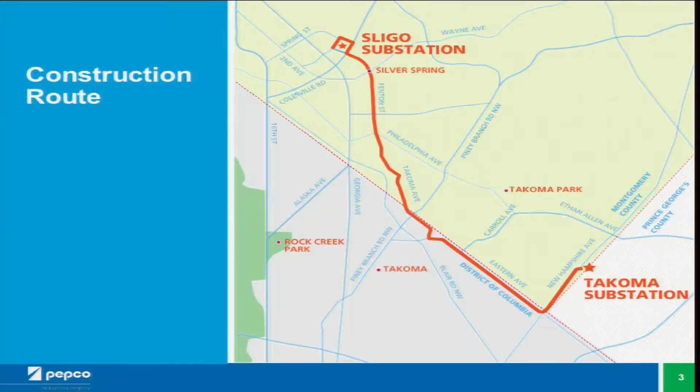I will now be stepping aside and handing over the presentation to our expert, because as much as I would love to tell you about the underground transmission construction process, it's a little bit out of my bailiwick. So I'll hand it over to Mr. Rich Ellison with CW & Sons.

Good evening. A lot of the questions that come up when we're talking to people in the community is, why is it taking so long?

Part of what I would like to show you is a step-by-step process of what we go through to put this in, so that you can better understand why this is a slower process than perhaps the average project you see out here with someone just digging a hole and putting a pipe in the ground.

Now the process starts out with the engineers coming out and laying out stakes like this through the neighborhood to show us exactly where to put the lines.

As soon as these stakes go in, a little truck comes along and you see the guy out there with the spray paint can, looking like your grandchildren with sidewalk chalk all over your sidewalks and the street area. This is to tell us where the underground utilities are. We need to know that before we dig.

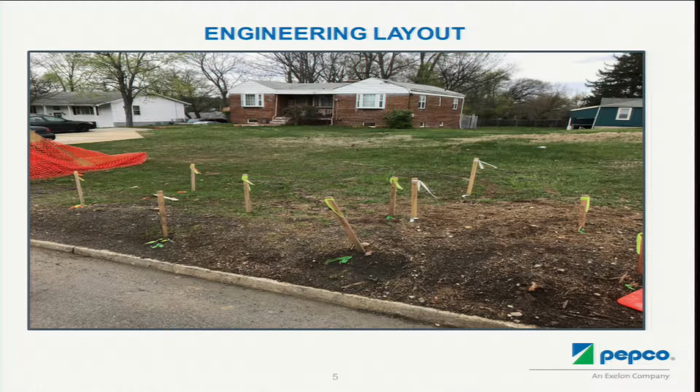As soon as we finish that, one of the noisiest processes is saw cutting. We cut about 12 inches deep to get through the concrete substructure. A lot of the reason for going so deep is so that any noise or vibration from what we're doing in the ground doesn't transmit to buildings or adjoining surfaces around it.

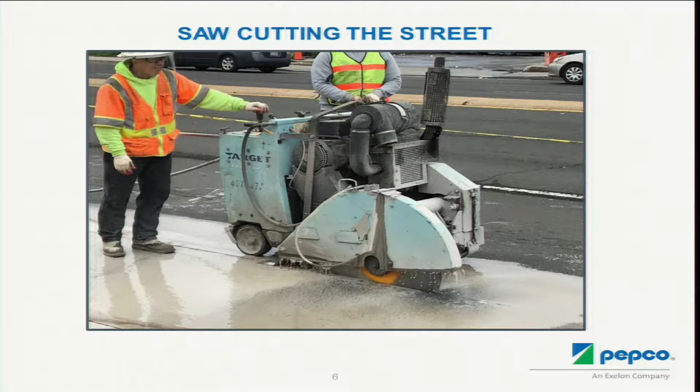When the saw cutting is through, there usually isn't any construction for a couple of days. All you'll see is the street with the lines in it, as you see right here.

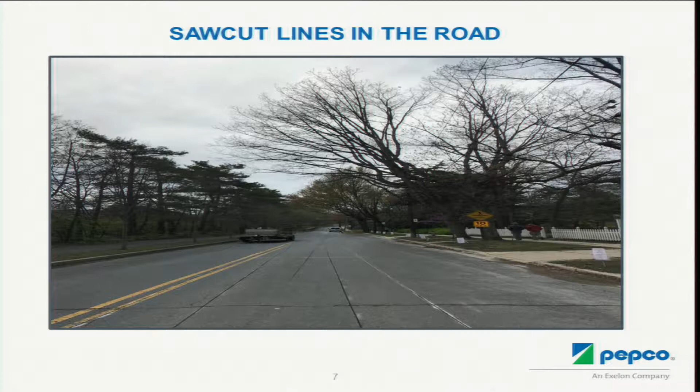Shortly after that, the crew will show up and start breaking out the asphalt. The asphalt is the surface on top of the concrete that we just mentioned.

You notice here the arrow is pointing to the 8 to 10 inches of concrete that is below the asphalt. This is actually the surface that takes the majority of the weight, but cutting through that protects adjoining houses and business structures so that this vibration doesn't damage their property.

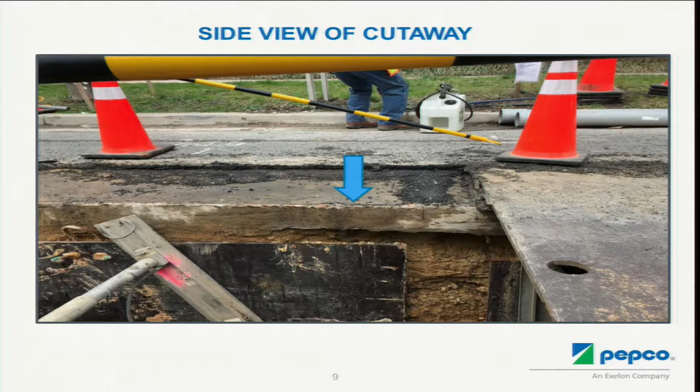Then comes the dirt. As we take and remove the dirt to put these in, these things go anywhere from 8.5, 9 feet deep to sometimes 20 feet deep.

As we're putting the pipes in, we're trying to get them under the other utilities as low as possible to protect them from other contractors digging in the road, also to get them as low as possible out of the way of future construction, and to get more ground around them to absorb the heat from the units themselves.

All of the dirt that comes out of the ground is removed to a landfill. Nothing that comes out goes back in.

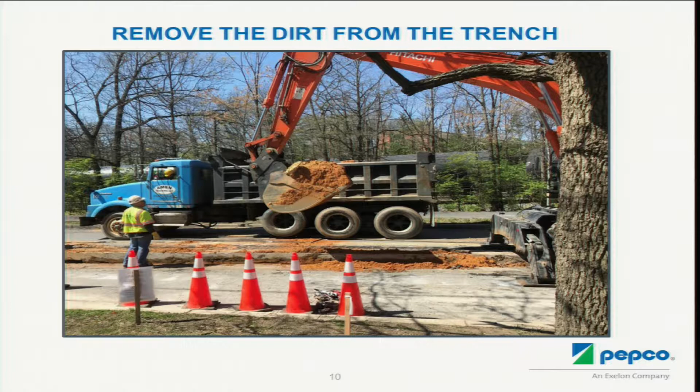I'll mention this truck again. This is one of our trucks. You'll see these trucks all over the road. Some of them will have our markings on them, some will have other contractors' marks on them. Notice the size of the truck, because it's relative to something I'm going to show you in a moment.

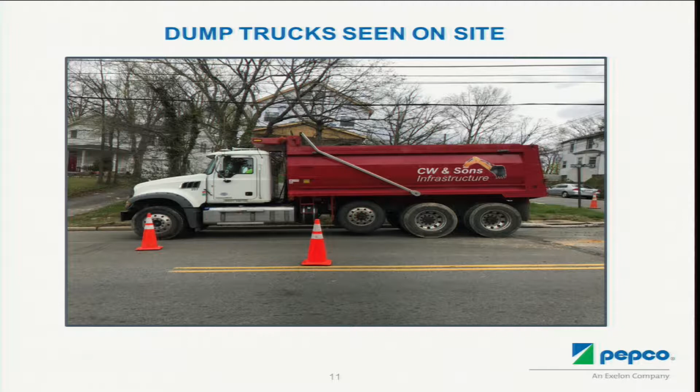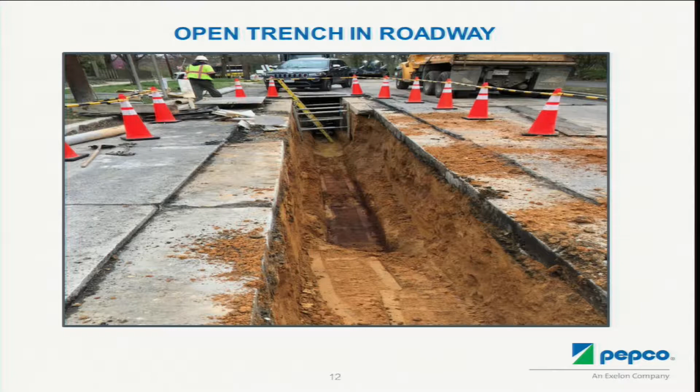So we're either putting in what they call pump jacks, where they're actually pumping against steel plates on the sides, or they have trench boxes that they put down in, which are pre-assembled steel boxes. Once we get them down inside, then the men can be down in the holes working.

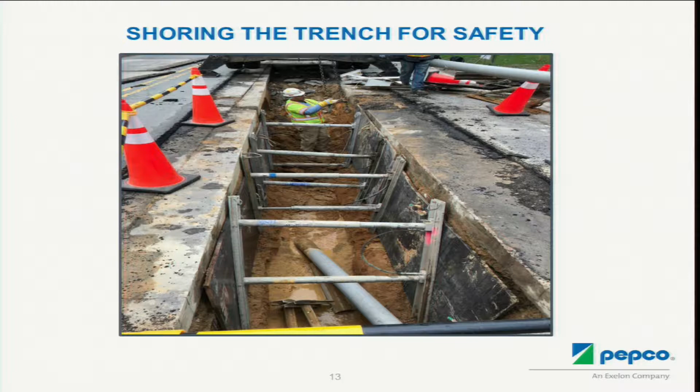Next comes actually installing the pipe itself. It takes a crew of 5 men to put in a single piece of pipe. There has to be men above the ground holding it.

As you'll see here on the face of this, you see the black here, those are spacers. Those spacers have to go every 5 feet. So this pipe has to be put in such a way that you're putting it through these spacers so it's always aligned, because realize we're running pipe 3.5 miles from one end to the other. So it's very important that A comes out on A on the other end.

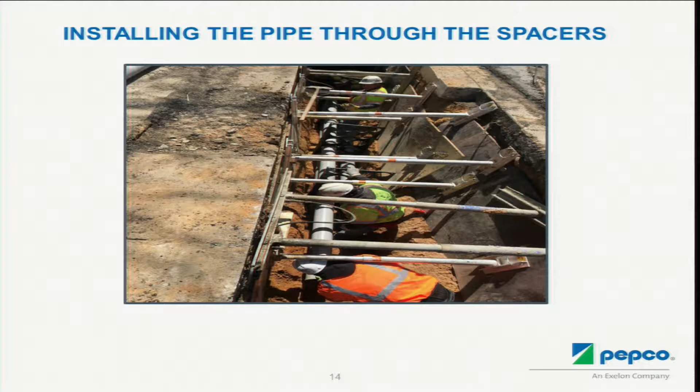Once this pipe is in and installed, we pour 2 inches of concrete on all surfaces and between the pipe itself. That's the red concrete you see right here in the hole. That's done so that if someone's digging at a later time, they'll recognize that this assembly is electrical, so it tells them to stop digging.

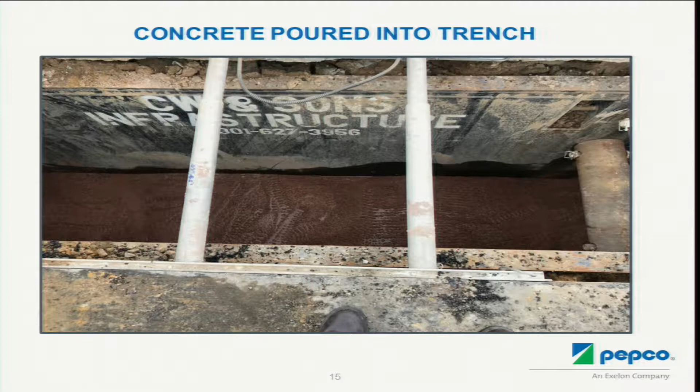Next we start backfilling. When we backfill, we use recycled concrete, or what they call RC6. All the concrete and asphalt that we take out goes out to recycling areas and is recycled, so everything we're putting back in the ground is recycled product.

As we go along, you see the arrow here pointing down to this thing. That's a piece of aluminum foil tape. This is put about 3 feet below the surface, so if someone's digging, it's another indication they've got something down there that they need to be avoiding.

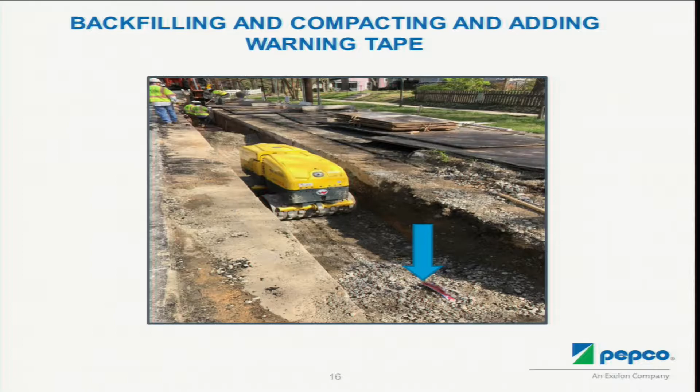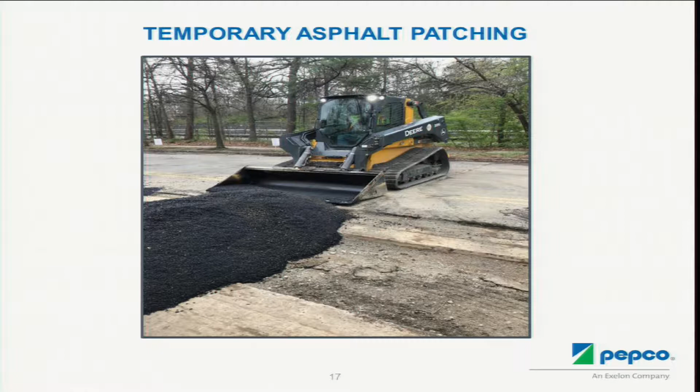Next, we'll come along and temporarily put asphalt paving into the area. This is to return it to the road surface so you can drive on it, so it can be a normal road surface. It's going to be a little rougher than a finished surface, but it's there to be a temporary protection for traffic.

They do roll it out and try to make it smooth, but over a little bit of time, this stuff gets a little bumpy. Especially if you've driven over on Eastern Avenue, all of you know it's very bumpy.

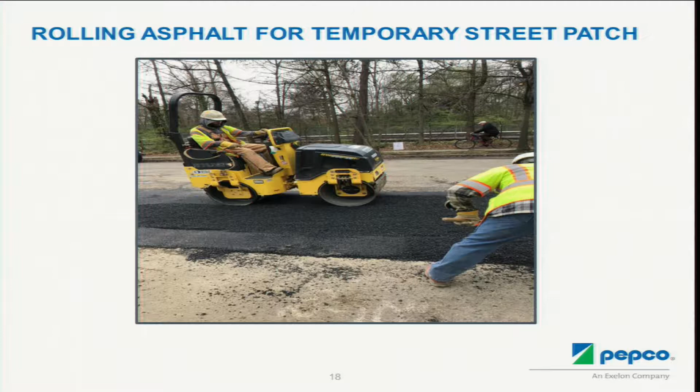Once we finish a section between manholes, the project is planned to come back, replace that concrete underneath the asphalt, and do a full surface paving curb to curb on your streets. So when you finish, you're going to finish with a finished road.

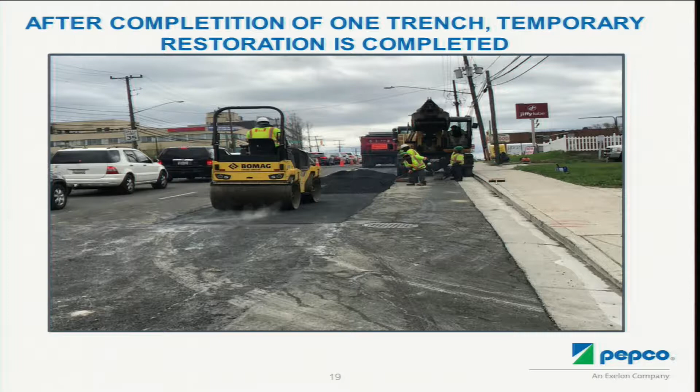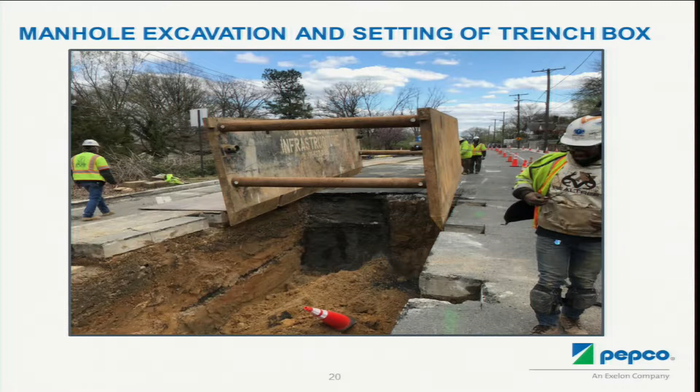The other thing we have to put in, because we need points where we can pull the wire through, is manholes. To give you an idea how big the manhole is, remember I was talking about the dump truck? The dump truck will fit in that hole.

So these are very large holes, which also means for traffic they're very dangerous holes. The steel plates we put over top of them are very important, and we take very seriously how we support this with structural steel underneath it.

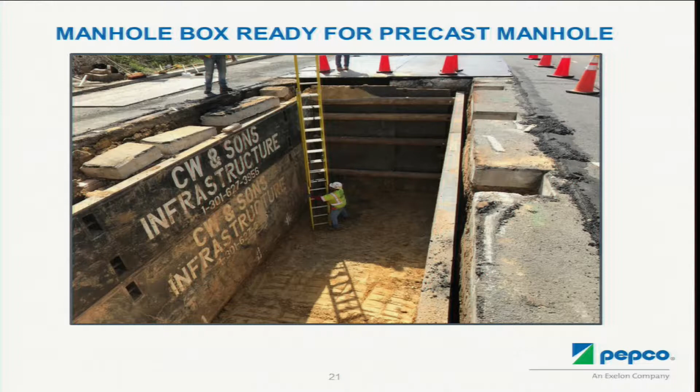This is the hole when they've actually put the line in. They're getting ready to lift the manhole into the hole. Here's the crane actually putting the manhole in. These manholes are about 8 to 10 feet wide and 20 to 22 feet long.

As I said, some of these manholes will be 12 to 14 feet deep. Some of them will go as deep as 20 feet.

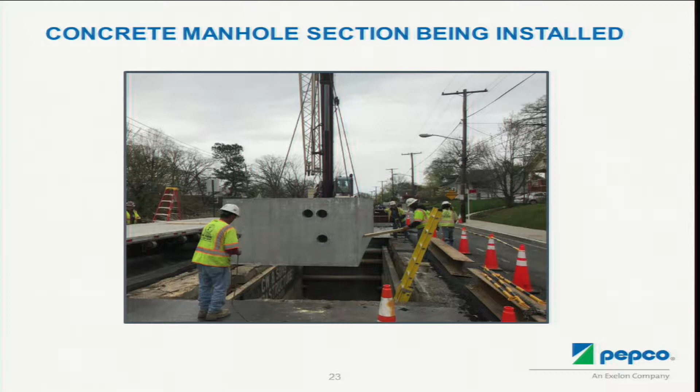When the manhole is in, it's basically just a huge concrete box, particularly made for this use. It already has the holes in it for where the piping will go. They're now going to put the lid on it. You can see that they have a sealant there trying to keep water out of it.

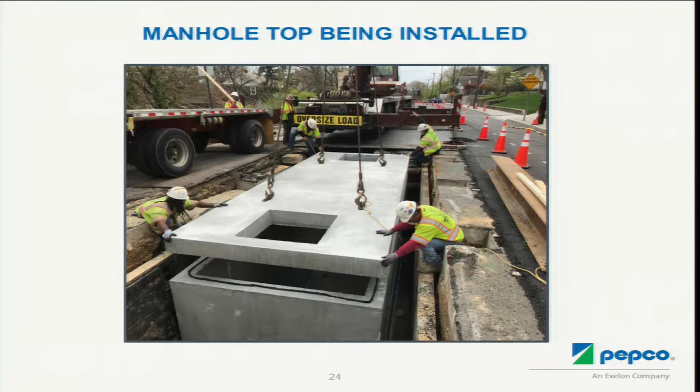Those square holes turn into finished manholes that you see on the street when you come across one and see it paved. That's what it started looking like before that metal cover was put over it.

At the end of each day, we go through and steel plate over anything that's possibly a hazard to drive on. Those plates are all welded together and pinned with steel.

Even so, we have a lot of areas with high truck traffic and bus traffic in it, so sometimes these things pop loose in the middle of the night. We always ask the neighbors to give us a call.

If they hear any kind of metal sound from the plate, we'll go out in the middle of the night and repair the plates again, because some of the buses get a little speed up and start bouncing on those plates, and the welds can break.

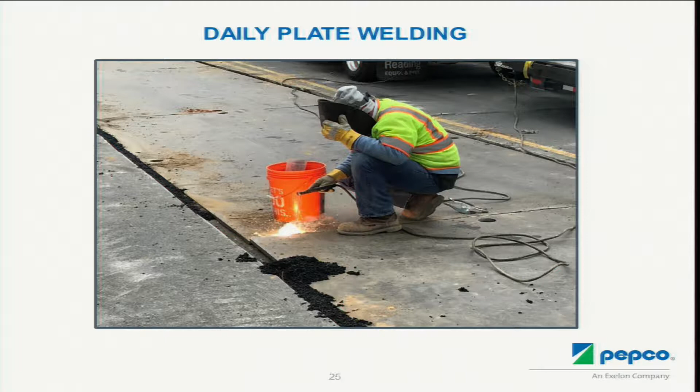When we finish it, we have the plate recessed into the asphalt. Any kind of surface irregularity that comes up, we put what they call CP, or cold patch, around it to smooth it out, so it's as smooth a driving surface as possible.

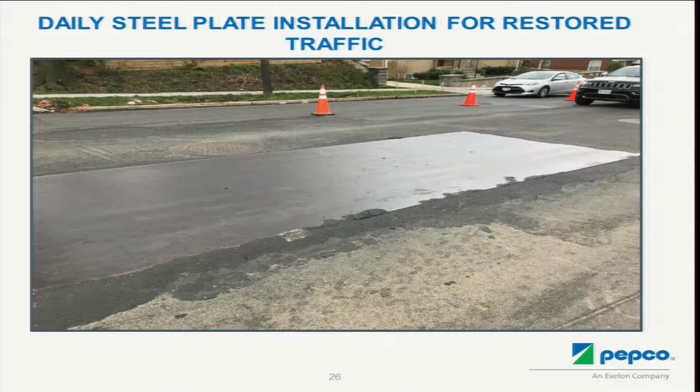When the road's finished, it will go back to looking like a standard brand new road. So as we finish up, you're going to wind up with new, clean, well-paved streets.

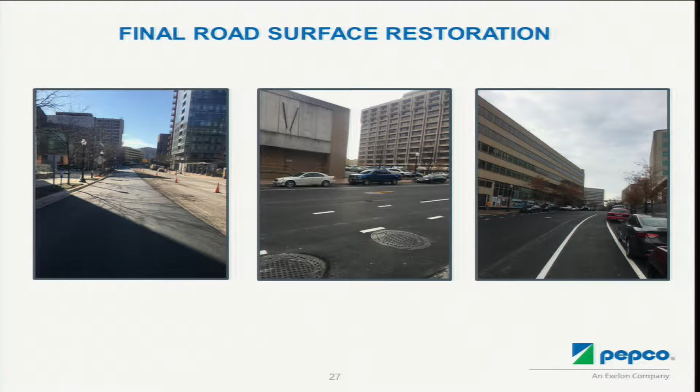One thing to be aware of is we only work for limited hours every day, from 9 to 3:30. That's all the county and municipalities are permitting us to work. That keeps us off the road during high traffic times, but it also cuts down the window we have to work every day. So instead of a full work day, we've got about 4 or 5 hours out there on site that we really get to work, which adds to the length of time it takes us to get through your neighborhoods.

Now, after the paving is done, I'll bring up Mr. Charlie Schupler, the engineer with Pepco, who can explain the process of installing the cable after we're completed.

So after Rich and his contractor finish all the civil work, which is the dirt, the disruption, and everything's repaved, we have to go back and actually put the electrical wire in the ground. All we have to do is go back to the manhole lids. We put in these huge manholes, but all we're doing is pulling cable from manhole to manhole.

So this is depicting the truck pulling up to one of the manholes. We're not digging any dirt, we're pulling up in front of a manhole, popping the lid. These are the cable reels on the back of the truck. The cable is fed down into the manhole, through the manhole lid, into the vault in the ground, into the conduits that were just installed. Then it's pulled approximately 3,000 feet between our manholes, and it comes out the manhole at the other end.

Before that, we pull a pilot line through — it's just steel wire attached to the end of the cable, with a winch at the other end, and the winch truck pulls the cable through. It's a very slow process; we're not flying the cable through, but it's completed in several hours. It's a one-day thing, or several days per manhole, but not a several-month-long process.

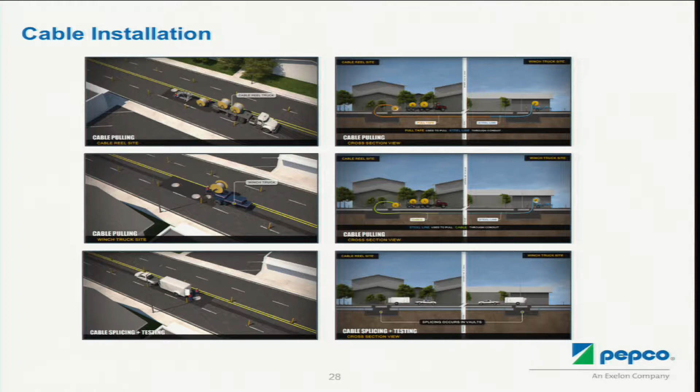Construction for this project began in September and is scheduled to continue through 2020. The civil work, which is digging in the street to put in the duct bank and manholes, started in September 2017 and is scheduled to go through spring 2020. Towards the end of that, as civil construction finishes up, we're going to start the electrical construction — pulling the wire through the conduit that was installed.

I think we showed the route map earlier showing the main roads we're going through, and Rich touched on the hours, but here they are in writing — the hours we're allowed to work on the street.

So who's working on Saturday then? And who's working after 3:30? Because I've been hearing people working on Saturday and after 3:30. When we work on Saturday, it's for one reason or another — we're at a stage where the county allows it. Can I ask you to say that into the microphone so we can get it for people who are watching? When you see a crew out there on Saturday, it's typically trying to pick up more schedule.

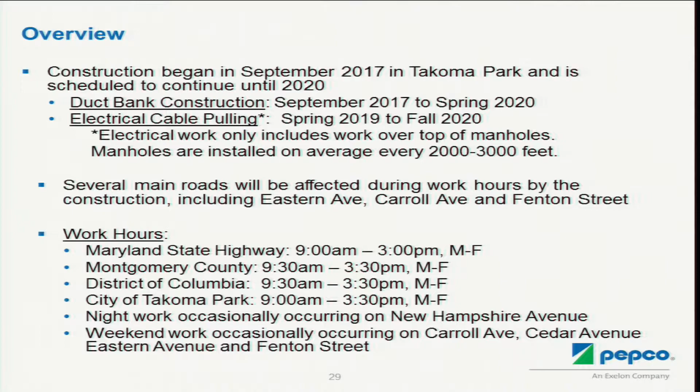We've had an extremely wet July, August, September, October this year — far wetter than probably we've ever had on record. So when you see crews out there on Saturday, they try to work the same hours, but they're just trying to play catch-up on the days we lose to rain.

And the people working after 3:30 are also playing catch-up? If the crew is there after 3:30 — like this evening there were 2 crews, we had 11 crews on the street this morning, and 2 of the crews were there a little bit late — typically that's because the concrete deliveries are coming late, since we can't control when the concrete trucks arrive. Or for some reason they're having trouble closing the hole up — if they have dirt caving in, they're doing extra excavation or extra shoring, and sometimes that will delay them another hour, possibly an hour and a half.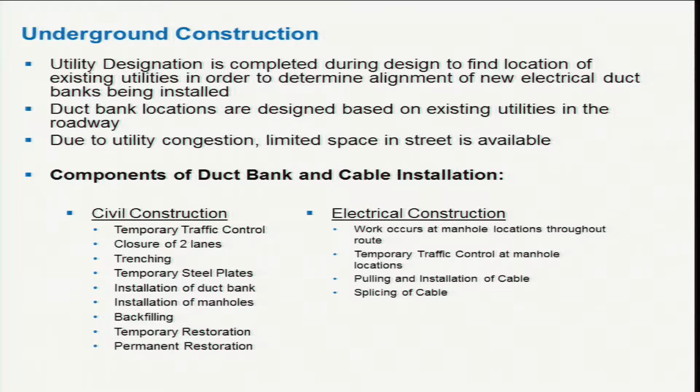Once we've installed this duct bank, we'll go back, backfill, and do the temporary restoration, which everyone has experience with. Then once we've certified from duct bank to duct bank, we go through and do the permanent restoration. And I believe I already touched on the electrical construction on the previous slide.

So Rich, do you want to talk about the construction progress here in Takoma Park? Yeah, basically what you have up on the screen is the work going through the city of Takoma Park. This particular segment goes from Piney Branch Road up right past the college and up towards Philadelphia, and it's under construction right now. Most of the areas next to the college are being shut down during the day, and the area near Piney Branch is just now reopening for one-way, one-lane traffic.

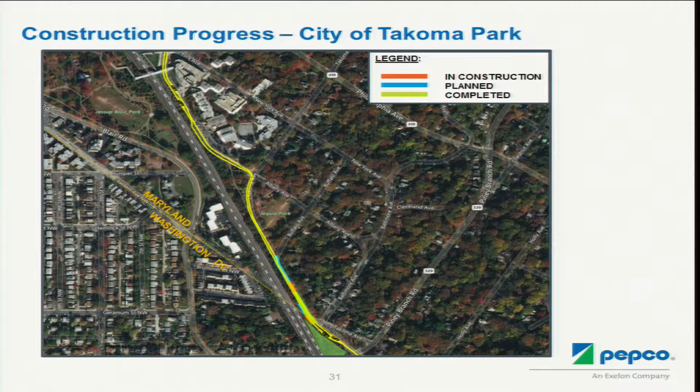Now, as we're doing the work on Takoma Avenue, I want to give you some examples. This particular one, we have a street shut down next to the college. We shut down the entire street, and if you see the arrows, we detour traffic around so it doesn't involve the construction site at all. Those detours take care of buses as well as car traffic. They're set up at 9 o'clock in the morning and down by 3:30 in the afternoon on most days.

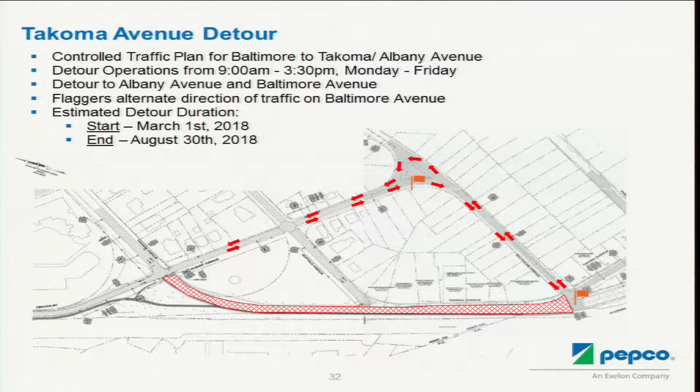Now, on Fenton Street, let's go ahead and switch, Charlie. This is the downtown Takoma Park area, which we're just moving into now. If you see where the little black squares are, that's where the manholes are already in the street on Cedar Street. We have a crew coming up towards Carroll, and there's a crew right at the bottom, right above the Pepco sign at Laurel, heading toward that crew now. So this area will be handled a little bit differently.

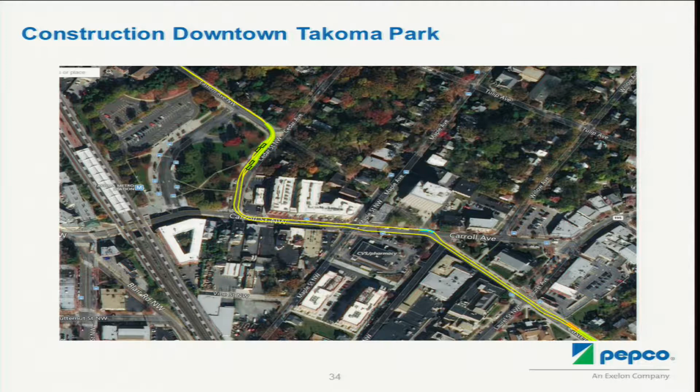Next slide. In this area, we'll basically be shutting down half of the street and using flaggers to keep traffic going in one lane, alternating traffic through that one lane area rather than shutting everything down. This way we keep the businesses open, we don't impact them, and we work with the business owners to coordinate, especially deliveries and any vehicle movement in and out. How long is this portion? A portion like that is about two and a half months.

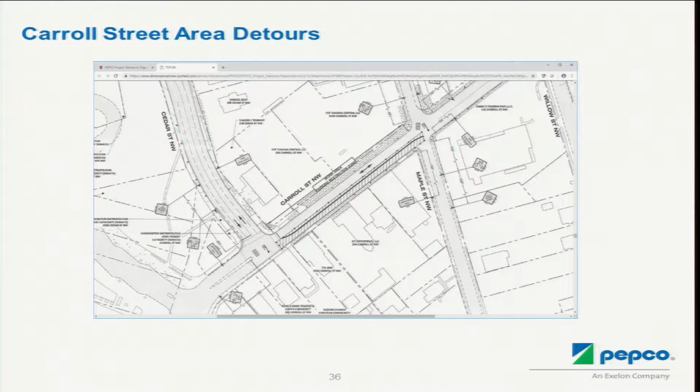As we get farther down on Carroll Street, you'll see Cedar coming in from the top left. Again, we basically try to work a block at a time. One, so we can control the traffic. Two, so that we don't totally make a mess out of the street with the traffic control. We try to keep our traffic controls about 500 feet apart, so there's time for the traffic to smooth out between hitting these blocked up areas.

All right, so high-level schedule. We're hoping to complete, or we've already completed, both duct banks between Takoma Substation and Whittier Street. That's this fall, but that's done.

Complete both duct banks between Sligo and Bonifant. That I believe is that complete, Rich? That's just now happening. They're in that section right now, they're working.

Okay, and complete civil work. So what we're doing is we're installing two duct banks. The first one is scheduled to be done by spring of '19, and the second one done by spring of '20. And then as these are finishing up, once the first duct bank's done, we're going to start pulling the electrical cable in there. Once again, everything will be wrapped up by the end of 2020 with the cable install.

And then, I live at the corner of...

Can you just move the mics that way we make sure everybody can hear you when we get you on the TV? I live at the corner of Walnut and Eastern, and you guys have been there for at least 2 months, is that right? No, 3 months, 4 months, and Walnut has been closed every day.

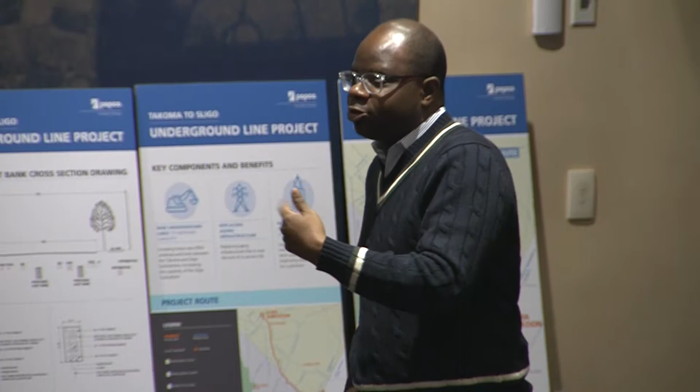If I can say, Madam Commissioner, I know you guys hired the community relations folks as an extension of our board. I know the director very well, so I can touch base with them. I think we need to tell all of us, not just me, we all need to know, but we need to have some reasonable idea. So this is really not fair to beat up on Pepco. Pepco is just one piece of it, probably the biggest one now, but the frustration is not going to end when they leave, whenever they leave. This madness is not going to stop.

No, we'll ask the questions, we'll submit any answers we can. And we really do need a meeting with everybody there. Can I go ahead and just ask the person who's at the mic who's been waiting so patiently if you had a question? Yeah, I just have a quick thing.

So I'm a senior in high school, I get home at 3 o'clock, and the quickest way is down Eastern Avenue in DC and take a left on Walnut. I get that you have to be there, that's fine, whatever. But when I go around, I'm already adding time. And I get there, and for a while, you were just blocking off Walnut from Westmoreland all the way up to Eastern Avenue in DC.

Even though you weren't there, there was another street in between there. So I would have to go all the way around, or maneuver my car around your whole road closed sign, because I can see where the road's closed and it's not there. Then that stopped, I don't know if one of my neighbors complained or you finally figured out that people actually do live there. And now what you're doing is there's Walnut is like here, and then Eastern Avenue in DC is here, and you're cutting off this corner, there's cones coming down, and you've got this much space to try to get around.